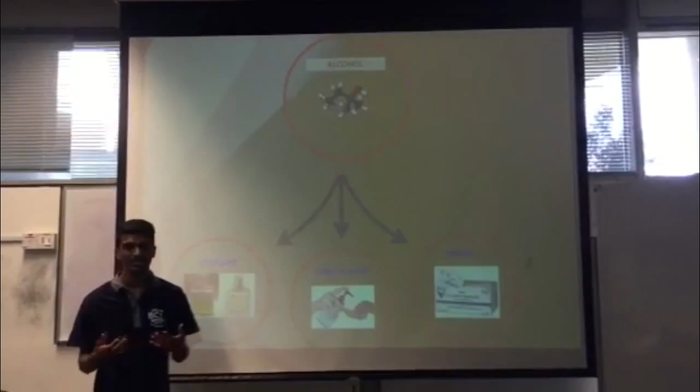So let's move on to the introduction. The basic uses of alcohol are, for example, perfume because it vaporizes quickly, as a chemical agent to dissolve many solvents, for example nail polish, and lastly in medical uses, for example to clean wounds.

Next, moving on to the history. Early archaeologists suggested that Babylon and Mesopotamia were the first or early stage where whiskey was produced, but it was not as commercialized as right now.

So moving on, why did alcohol begin as a beverage? Initially alcohol was basically used as perfume and aromas, but in Europe, Christian monasteries demanded that producers of alcohol make a beverage out of it with a variety of flavors for a part of their ritual. This caused Ireland and Scotland to produce or initiate the first whiskey production.

So what makes whiskey unique? Due to low access to grapes, grain was used as a substitute raw material. Before this, alcohol was made from fermented grapes, berries, and other fruits.

So when beer is produced, it is then distilled to produce whiskey, which is correlated to what we have done in the first experiment: distillation, where a substance which is more concentrated is produced. This means whiskey is much more concentrated than beer, and indirectly means whiskey has more alcohol content.

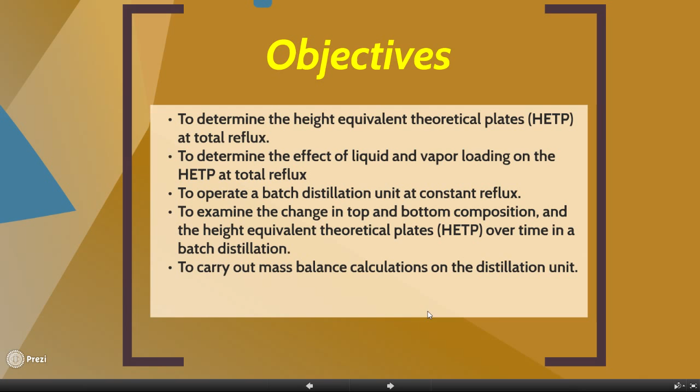Now let's look at the customer choice of whiskey. Basically in this section, we are representing the top sellers of whiskey brands, which we shortlisted to 3 brands where customer demand is high.

Third in the list is Crown Royal, which statistics show had a decline of 4% in production in 2014. Even though it has been 75 years in the business, it was not unique enough to boost its sales.

Next, second in the list, Jim Beam, which indicated a 7% increase in production in 2014, with 7.4 million cases. The brand has popularity in Japan as one of its parent companies has invested there, and its cinnamon flavored whiskey grabs the attention of customers. It also has a place in the fast-growing Indian market.

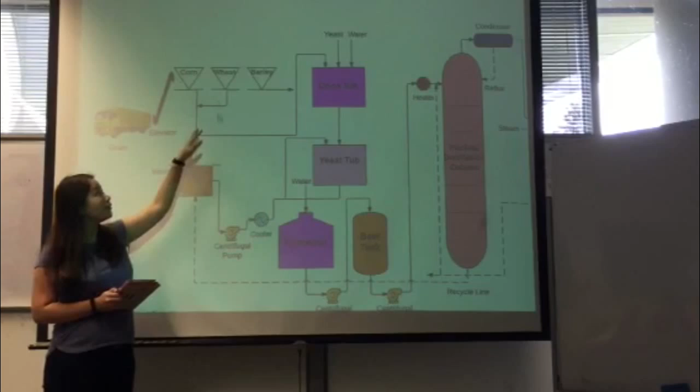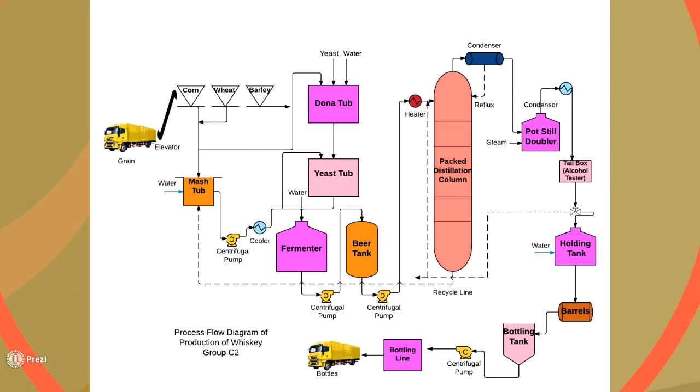The barley and other grains are put into the grinding mill to grind them into powder form. After that, it is sent into the Dona Tub and cooked with water. The purpose of sending the powdered grains into the Dona Tub is to allow the natural enzymes in the grains to start breaking down the complex starches into simple sugar.

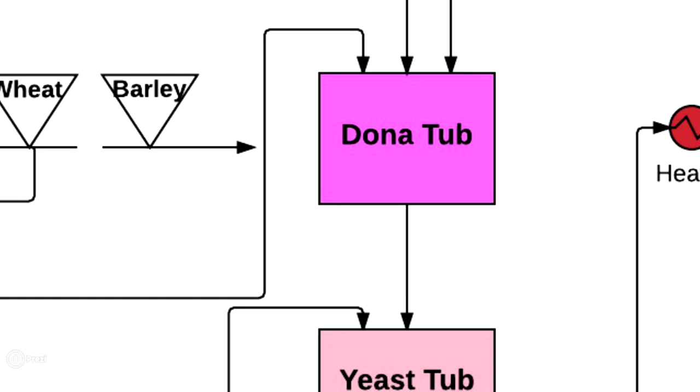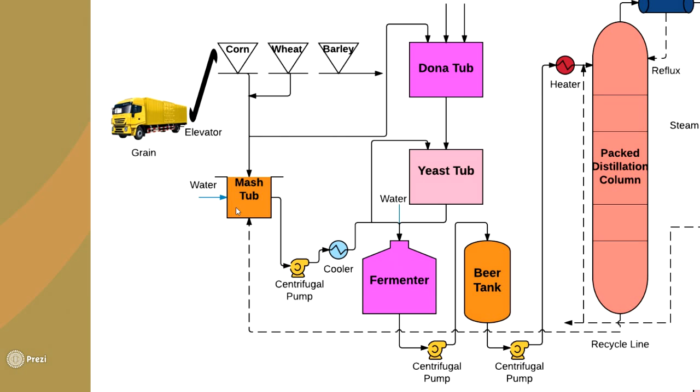Once the grains are turned into dextrose, they are ready to be fermented. The dextrose, prepared in a mash tub, is transferred to a fermenter for processing. In the fermenter, yeast is added. Certain yeasts, as they consume sugar, give off alcohol and also carbon dioxide.

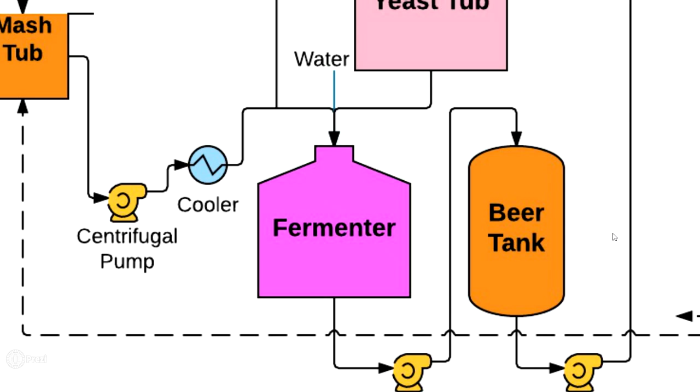In order to raise the alcohol content above 14% to 16%, it must be concentrated through the distillation process. Distillation, or rectification as it is sometimes called, separates the alcohol from the other liquids and solids that make up the converted mash. This converted mash is called beer.

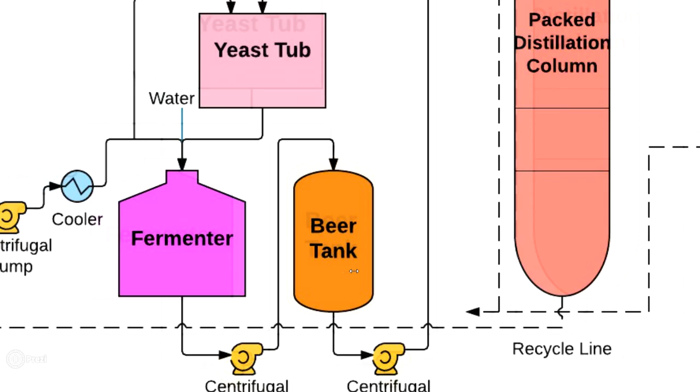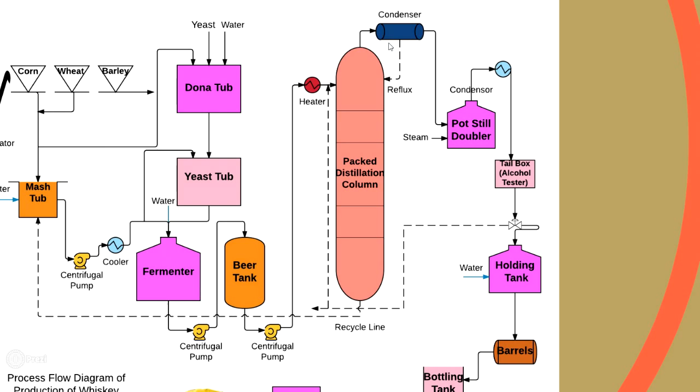The beer is heated to the point where the alcohol boils. Fortunately, alcohol boils at 172.9 degrees Fahrenheit, while water, the other main liquid in the beer, boils at a higher temperature of 212 degrees Fahrenheit. As the alcohol vapors are given off during boiling, they are collected and passed through a cooler. The cooler condenses the hot vapors back into a liquid, minus most of the water.

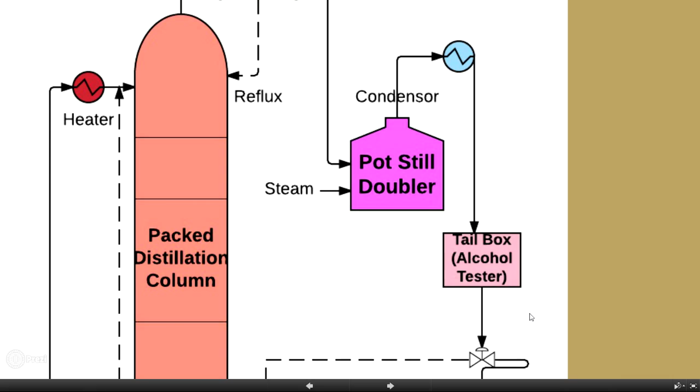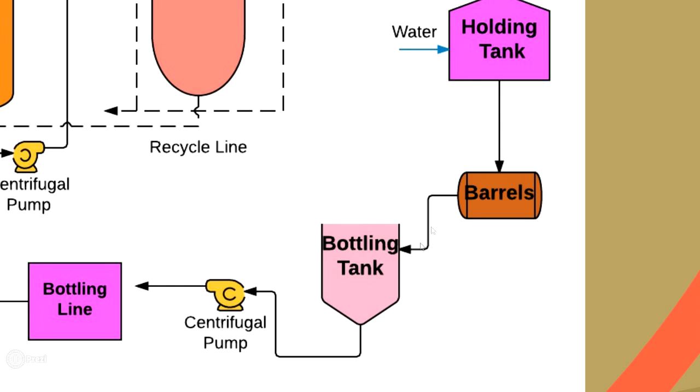From here, the alcohol is ready to be used. To smoothen out the taste to where you have very drinkable alcohol, the alcohol is placed in wooden barrels. The barrels are stored for a number of years. After aging, the alcohol is ready to be bottled and consumed. That's all for my part.

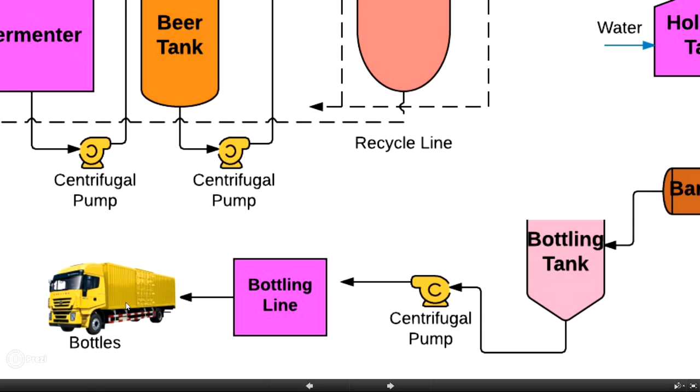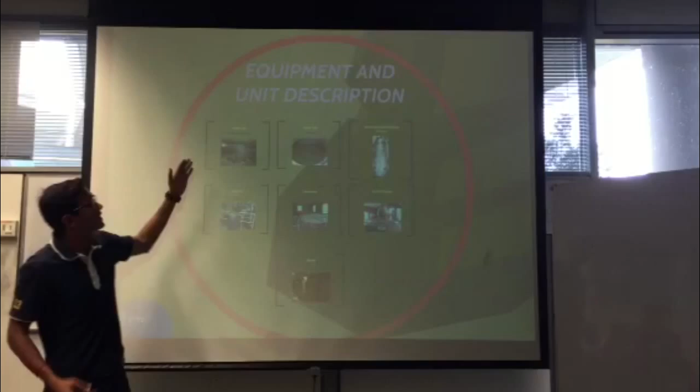Good evening everyone, my name is Teo Chu. I'm going to explain the equipment and unit description. As you guys saw earlier, the process was explained by Saming Yen. Now I'm going to explain the important equipment in the process industry. Well, the first one is the mash tub.

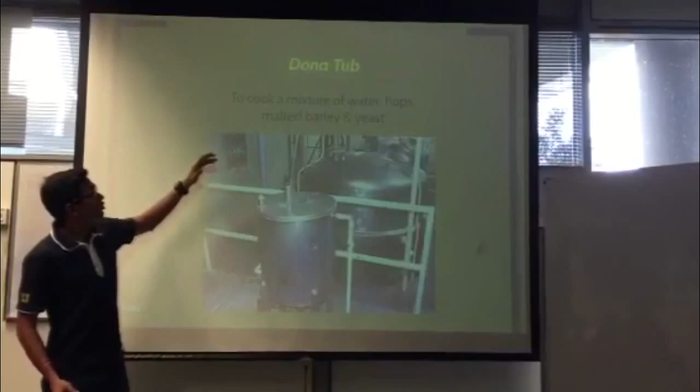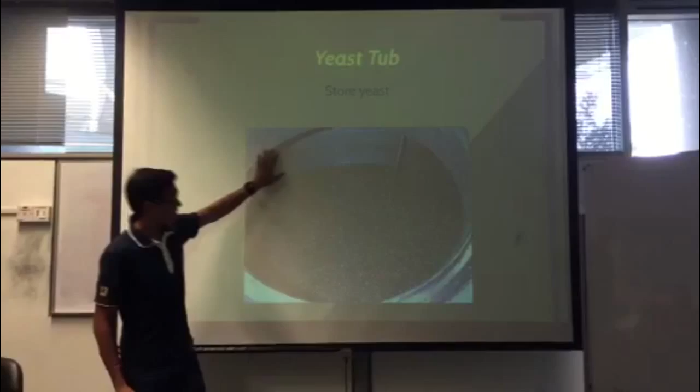The function of the mash tub is converting starch into sugar. Besides that, we also have the Dona Tub, where you cook a mixture of water, hops, and malted barley and yeast. Then the yeast tub, as you guys can see, stores the yeast for the next process.

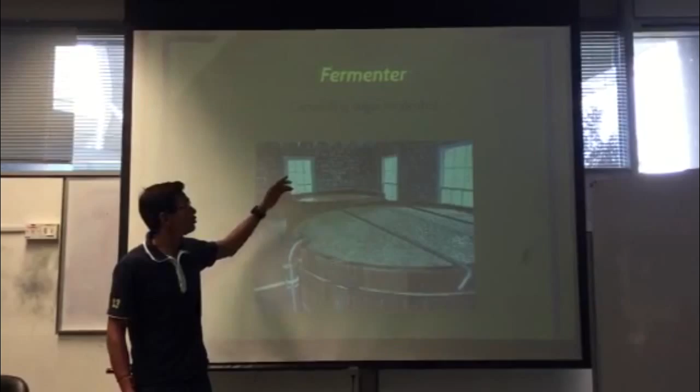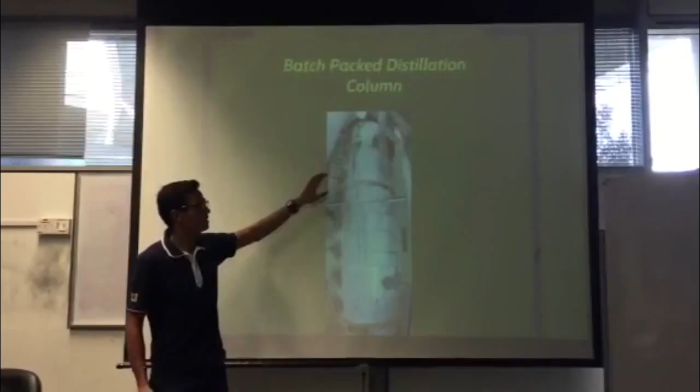And the fermenter, I think most of us are familiar with the fermenter. The function of the fermenter is converting sugar to alcohol. But last and not least, the most important part in the process industry, which is the batch packed distillation column. In the batch packed distillation column, we have a few important pieces of equipment.

The first one is valve positions. There are many valve positions in the batch packed distillation column. The function of the valve position is to control the flow of liquid and vapor in the system.

Then the second one is the heater power. The function of the heater power is to vary the flow rate of the vapor and liquid inside the distillation columns by adjusting the heater output power between 0 and 100%.

Inside the distillation column, we have the packings. The function of the packings is to hold up the liquid to provide better contact between vapor and liquid for better separation achievements. Another component is the reboiler.

The reboiler provides proper vaporization for the distillation process. The next one is the condenser, which cools down and condenses the vapor leaving the top of the column, while the reflux drum holds the condensed vapor leaving from the top of the column.

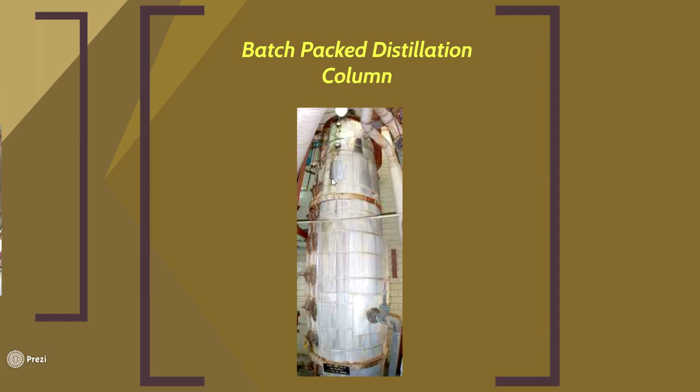Last but not least, the pot still doubler. What's the function of the pot still doubler? Its function is to adjust proof to 125 degrees maximum, which is used to denote the alcohol content.

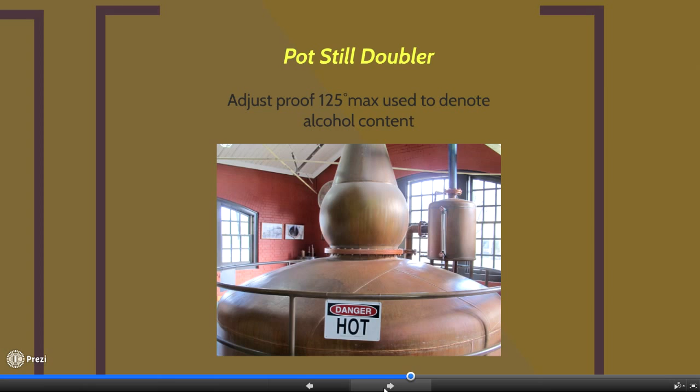After we adjust the proof of the alcohol level, we put the product inside the holding tank, which holds the final product of the process, and we send the final product into the barrel, where we keep the whiskey for several years to let it age.

Next, I would like to discuss the results and data for our experiment done in UTP. The first experiment is batch packed distillation at total reflux. The objective of this experiment is determination of the height equivalent theoretical plates (HETP) at total reflux, and determination of the effect of liquid and vapor loading on the HETP at total reflux.

Experiment 2 is batch packed distillation at constant reflux. The objective of this experiment is to operate a batch distillation unit at constant reflux, to analyze the change in top and bottom composition and HETP over time in a batch distillation, and to carry out mass balance calculations on the distillation unit.

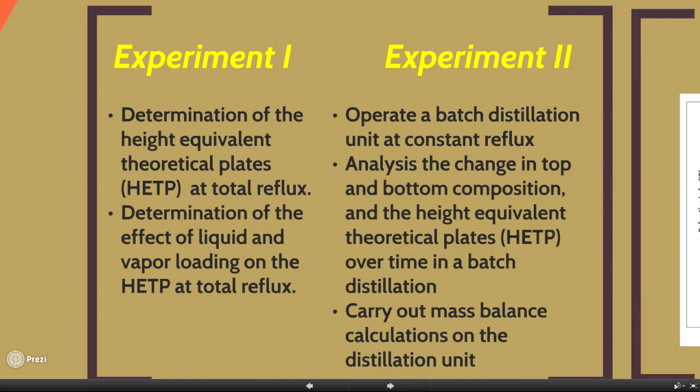Next I would like to explain the tabulation of results of our experiment. Before experiments 1 and 2, we did a preparation of refractive index versus composition plot. We took different mixtures of ethanol and water at different volume percentages, and measured the refractive index of each solution.

We can see from the graph of refractive index versus mole fraction of ethanol that a higher mole fraction of ethanol shows a higher refractive index, which shows that refractive index is directly proportional to the mole fraction of ethanol.

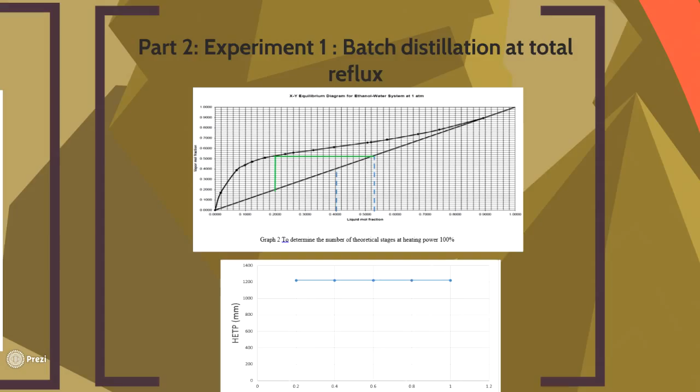Next, I would like to explain experiment 1, which is batch distillation at total reflux. From graph 2, we see the vapor mole fraction versus the liquid mole fraction. From this graph we can determine the number of theoretical stages at a heating power of 100%, and we conclude that only one theoretical stage can be determined from this graph.

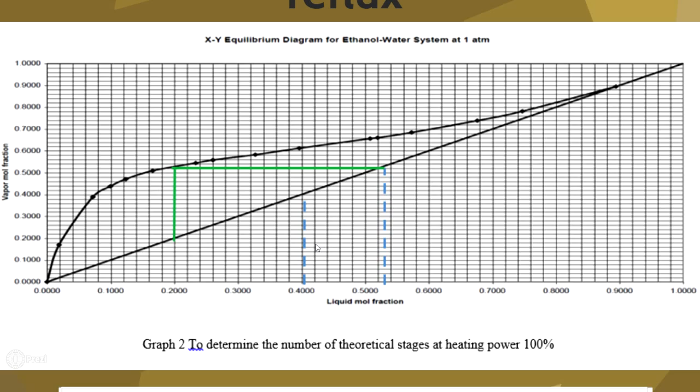The next graph is HETP versus heating power. From the graph, we can see that although the heating power is changing, the HETP remains constant throughout the process.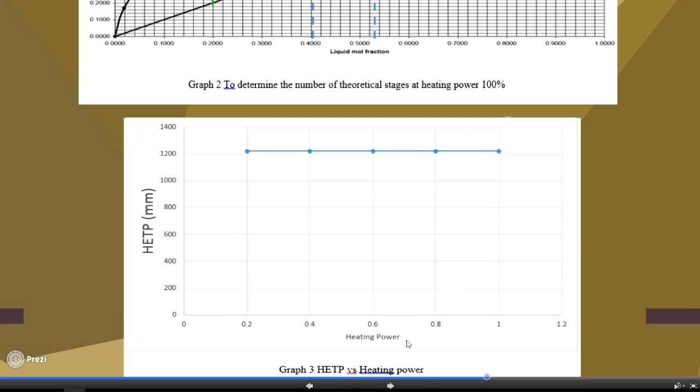Other than that, I would like to explain experiment 2, which is batch distillation at constant reflux. From graph 4, we see 1 over (y minus x) versus the mole fraction of ethanol in the reboiler, XB. From the graph, we see that 1 over (y minus x) is directly proportional to the mole fraction of ethanol in the reboiler, XB.

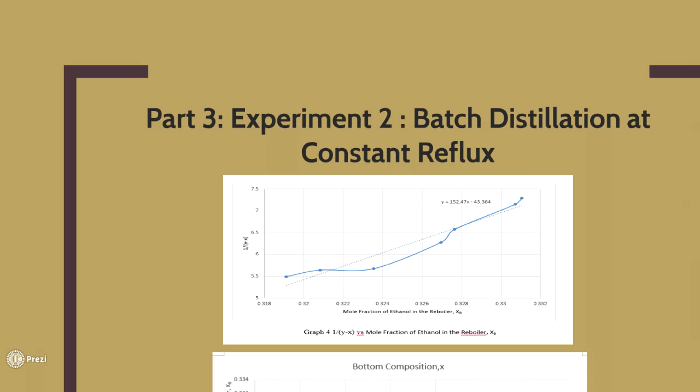The next and final graph, graph 5, is the mole fraction of ethanol in the reboiler, XB, versus time. As we can see, the mole fraction of ethanol in the reboiler XB decreases as time increases.

So this is the conclusion part for our experiment.

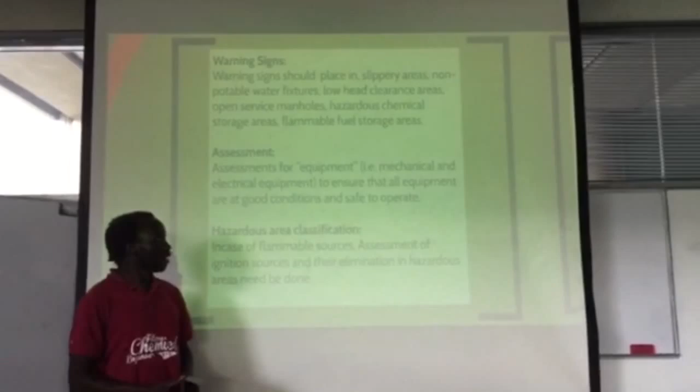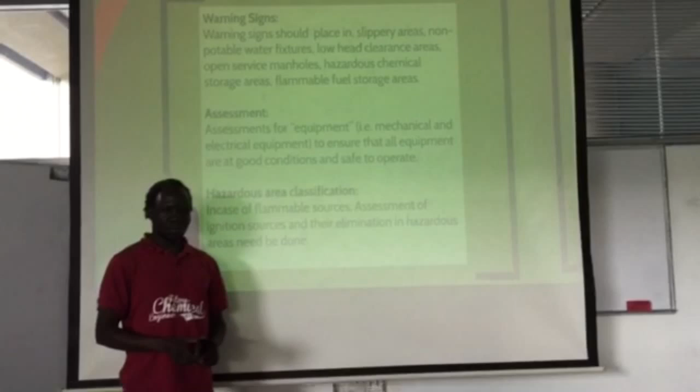Good evening. I'm going to talk about safety considerations. In the production of whiskey, there's production of ethanol, which is highly flammable, and there's generation of dust, fuel, and vapor, which is highly explosive. So we have safety considerations to take into place while working in the whiskey plant.

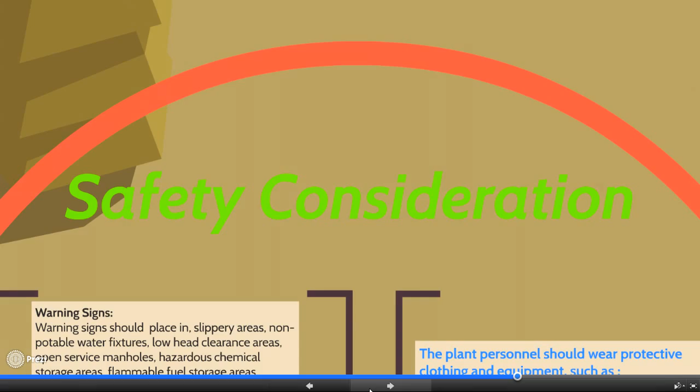In the workplace, the safety of the workers and the environment around is important. Hence, safety precautions and other considerations need to be put in place. This includes the following.

First, warning signs. Warning signs should be placed in slippery areas, non-potable water fixtures, low head clearance areas, open service manholes, hazardous chemical storage areas, and flammable fuel storage areas. This ensures that workers are not exposed to high risk.

Second, assessment of mechanical and electrical equipment should be ensured. This makes sure that workers are not put in danger.

The third point is hazardous area classification. In case of flammable sources, assessment of ignition sources and their elimination in areas needs to be done.

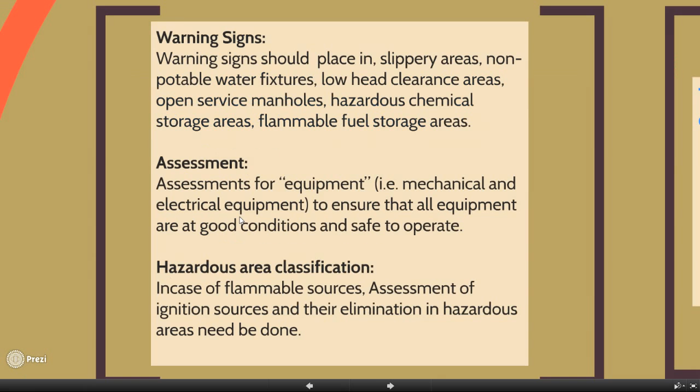Fourth, plant personnel should wear protective clothing and equipment such as self-contained breathing apparatus, chemical workers' goggles, dust masks to protect lungs in chemical areas, rubber gloves and boots, and safety harness line.

Chemical handling and safety. In the production of whiskey, there are other chemicals that need to be handled with care. The chemicals involved include the following.

One is ethanol. Ethanol is a highly flammable liquid with a relatively low flash point. This can cause explosion. Therefore, it should be properly stored to avoid the risk of explosion.

Two is carboxylic acid. Carboxylic acid is risky in that when workers are doing maintenance, sampling, or analysis, there is a risk of exposure. So care must be taken, and it must be stored properly to avoid the risk of workers inhaling it.

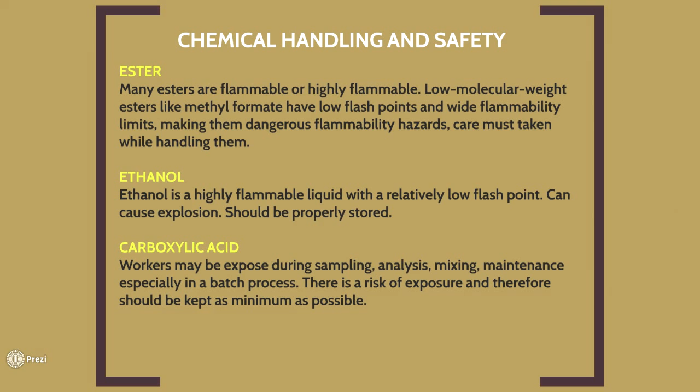The third one is esters. Esters are highly flammable, especially low molecular weight esters like methyl formate. They have a low flash point and wide flammability, so workers need to handle them with care and keep them in a proper storage place.

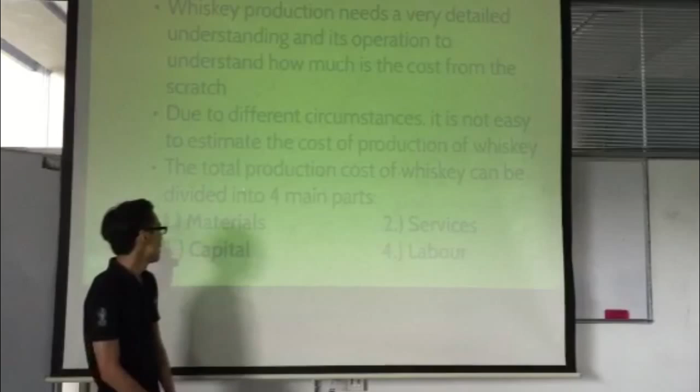Whiskey production needs a very detailed understanding of its operation to know how much it costs from scratch. Due to its different circumstances, it is not easy to estimate the cost of production of whiskey. The total cost of production of whiskey can be divided into four main parts: materials, services, capital, and last but not least, labor.

In the capital, 90 million has been spent. Financing costs and warehousing costs are part of it. Financing is the funds to finance the inventory from the time of production until a sale takes place.

In services, the transportation cost is included as well. The whiskey will be transported by train, and food and other drinks can be carried as well with the Scotch whiskey. The usage of train can reduce the emission of carbon.

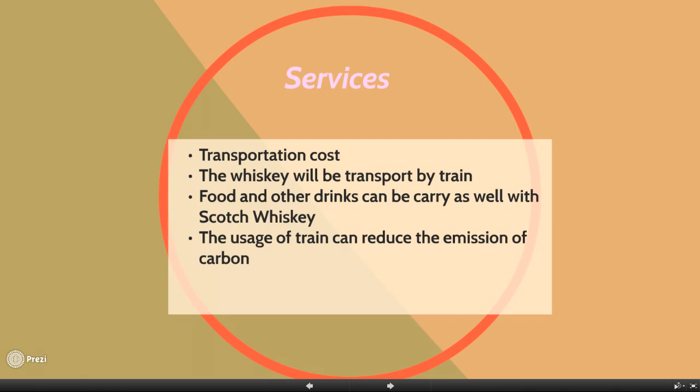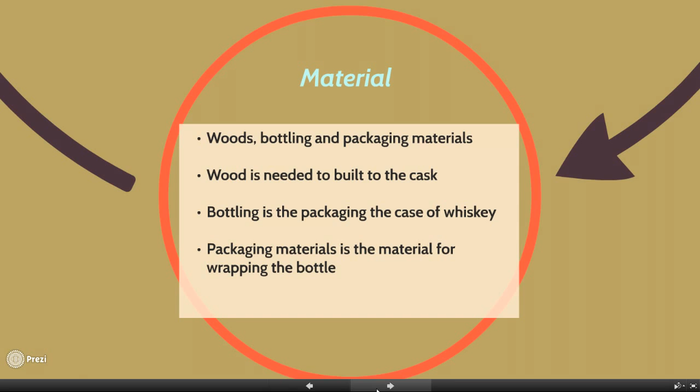To draw a conclusion, generally the objective of this experiment has been achieved. At total reflux, as the heater power increases, the number of theoretical plates also increases. At constant reflux, as time increases, the mole fraction of ethanol in both distillate and bottoms increases. The mole fraction in the evaporate increases with respect to time. However, HETP increases as time goes by. This scenario can be applied in the distillation of whiskey, in a big plant with whiskey at the top as distillate and water as bottoms.